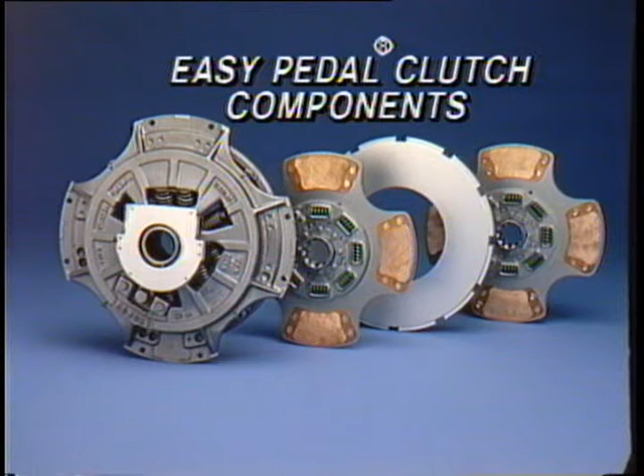Eaton Fuller Easy Pedal angle spring clutches are made up of 4 major components: the cover assembly and 2 driven discs separated by an intermediate plate. These heavy-duty clutches are pull-type, dry disc design.

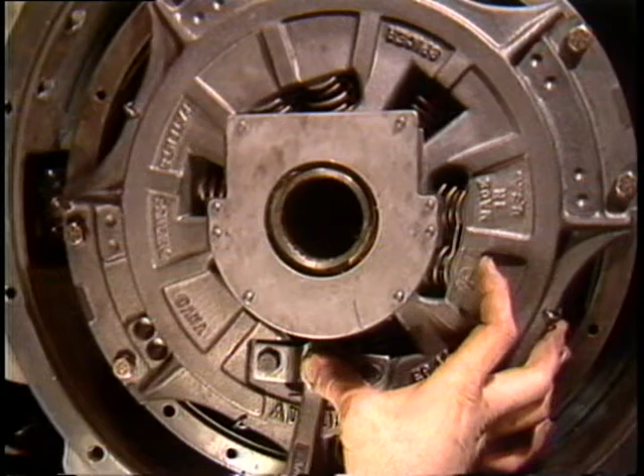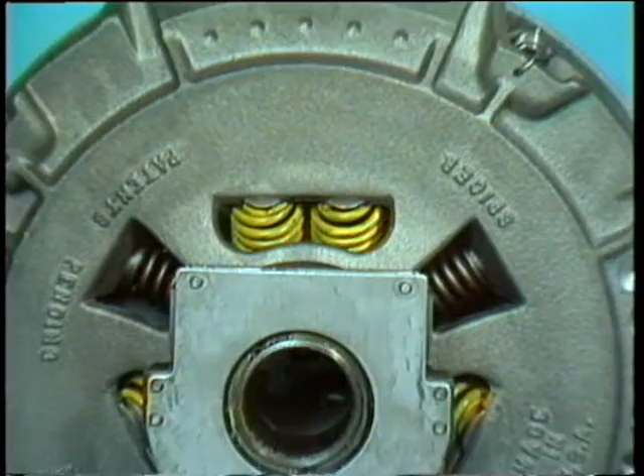In service, mechanical adjustment is required periodically and is facilitated by Fuller's Quick Adjust mechanism. Easy Pedal 2000 models feature the 6-point Quick Adjust mechanism and power thread technology. 3 pairs of angle springs are equally spaced around the clutch cover to reduce the pedal effort required when engaging and disengaging the clutch, ensuring a constant plate load. 3 additional springs are designed to facilitate disengagement and reduce overall pedal effort.

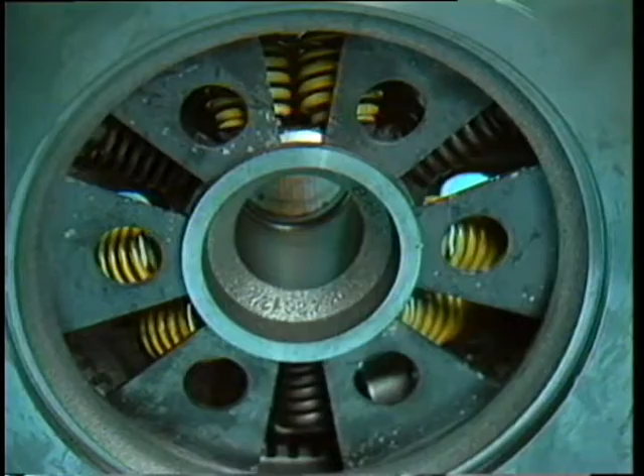In all Eaton Fuller heavy-duty clutches, the springs are isolated from the direct heat of the pressure plate and are angled. Eaton's 15.5-inch clutch has a positive separator pin that improves clutch life and performance by providing cooler operation, smoother engagement, and equal plate separation. The separator pin allows the intermediate plate to move back when the clutch is released, giving a constant gap on both sides of the intermediate plate.

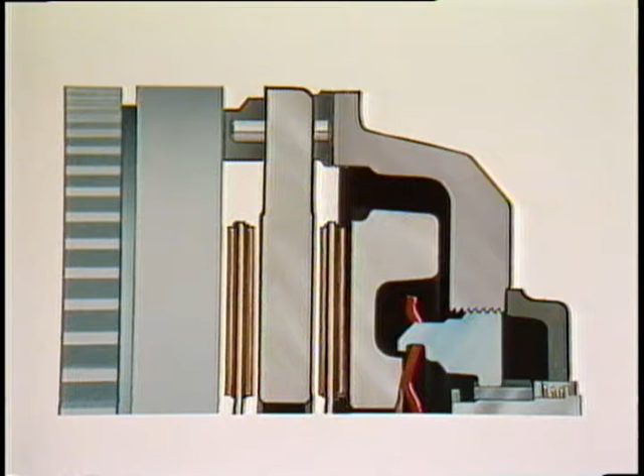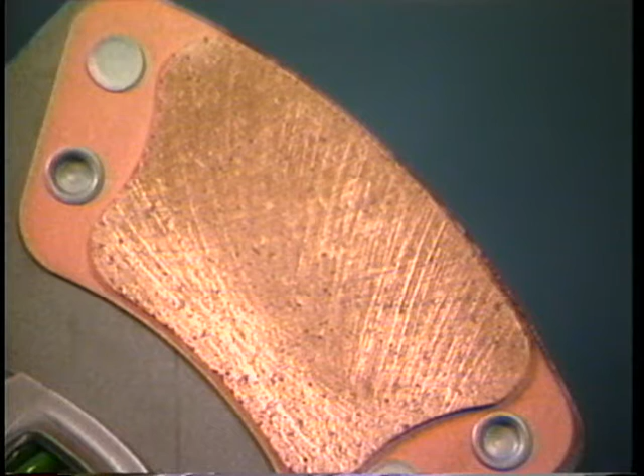Driven discs are available with organic or ceramic facings. Organic facings are for medium-duty highway use, while ceramic facings are for heavy-duty highway or off-highway applications. The life of a clutch is increased by using ceramic-faced driven discs.

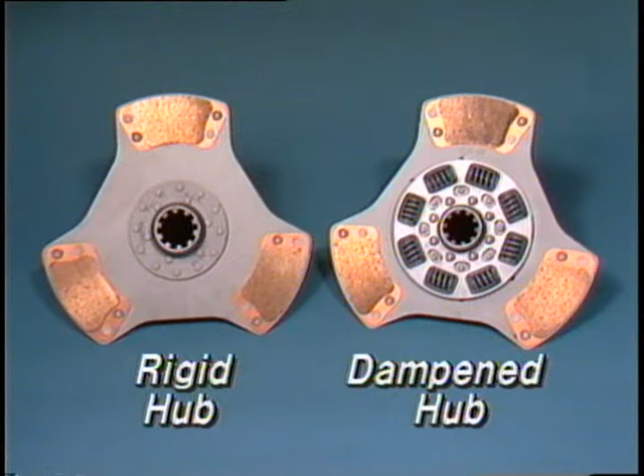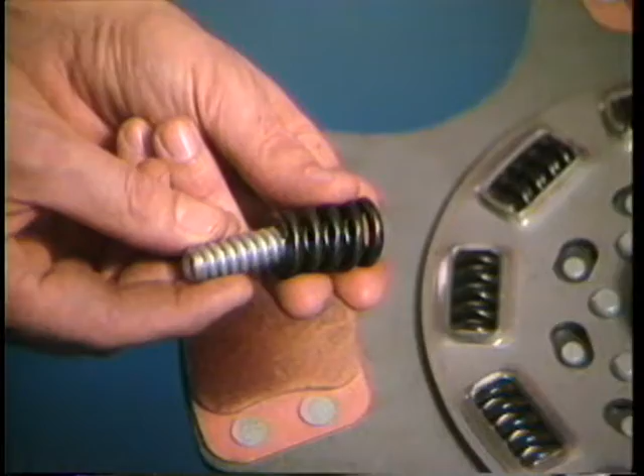Driven discs may be furnished with a rigid or dampened type hub. The dampened type is recommended because of its greater capacity to absorb shock, control torsional vibration in the drivetrain, and reduce spline wear to the transmission input shaft. In extra heavy-duty applications, coaxial springs are used. Coaxial springs are springs within springs which additionally reduce shock and control torsional vibration.

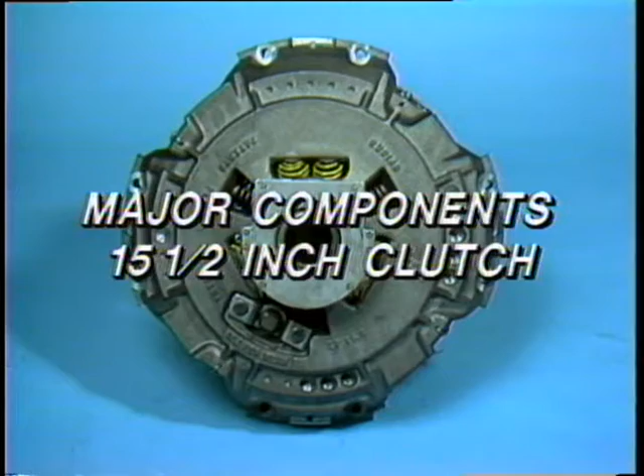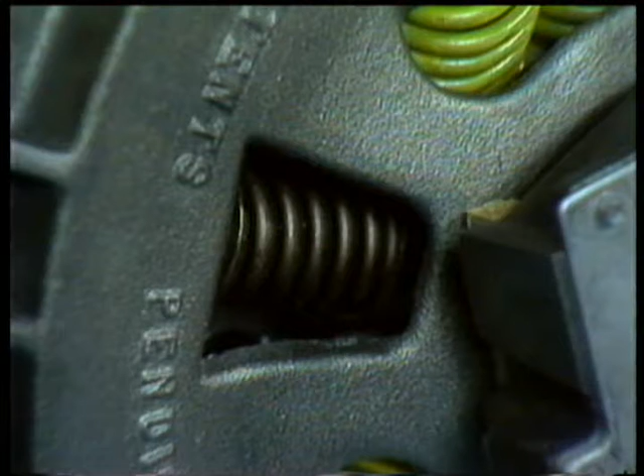Major components of a typical 15.5-inch cover assembly are Fuller's exclusive positive separator, the pressure plate and levers, pressure plate return springs, exclusive internal assist springs, cover, adjusting ring, pressure springs, release bearing, release sleeve, and quick adjust mechanism.

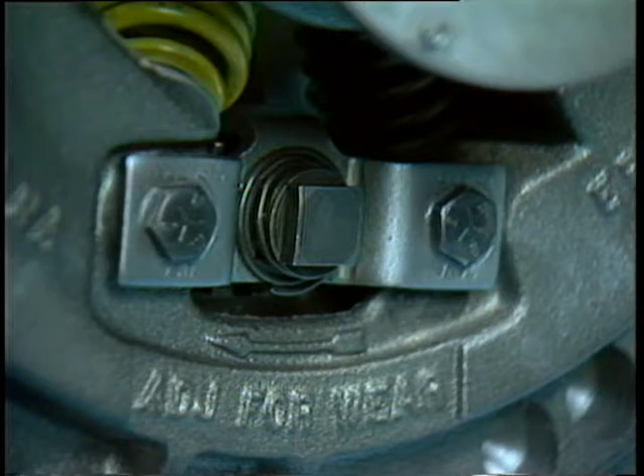14-inch clutches use a different intermediate plate, pressure plate, clutch cover, and driven discs. All other components are the same as in the 15.5-inch clutch.

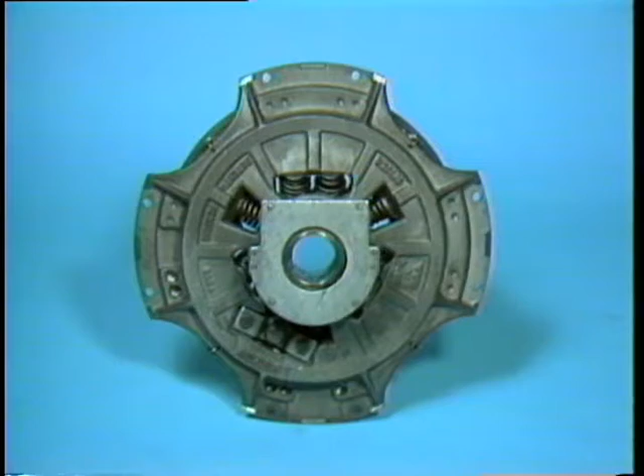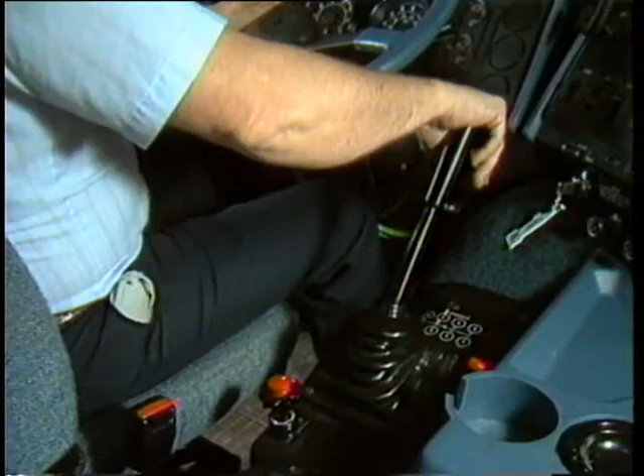On most non-synchronized transmission applications, you will want to install a new clutch brake. Clutch brakes help drivers shift into first or reverse without transmission damaging gear clash. They ensure smooth shifting and are only activated when the driver pushes the clutch pedal to the floor. It should be noted that clutch brakes should never be used for upshifting.

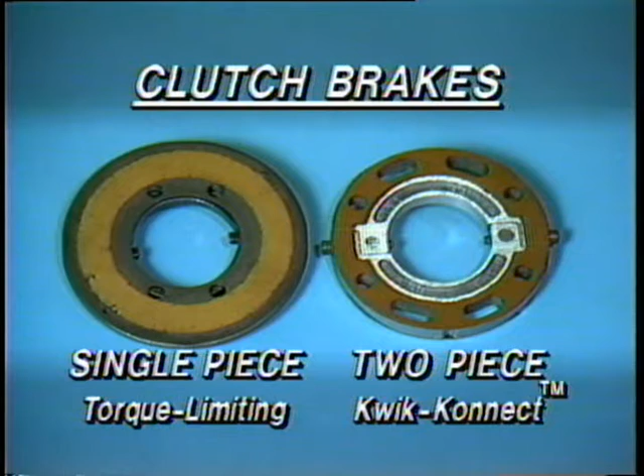Fuller offers 2 types of clutch brakes: the 2-piece Kwik-Konnect model, which can be installed without removing the transmission. Brakes are also available as single-piece torque limiting models. We recommend the torque limiting type because it's designed to slip when heavy loads are reached and therefore extends its service life.

Eaton Fuller clutches should be replaced when adjusting cannot correct for a loss of free pedal or cannot compensate for a slipping clutch.

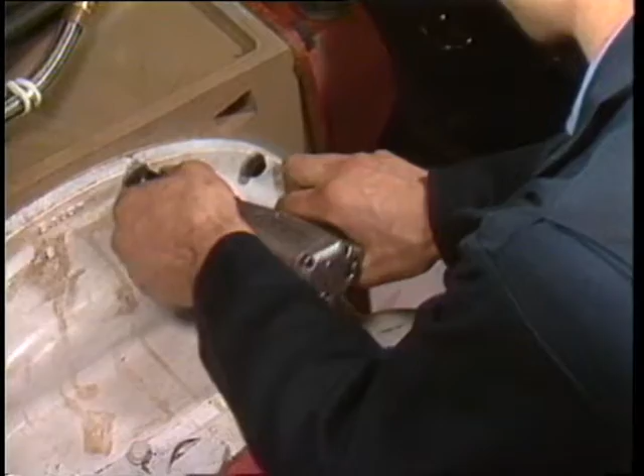If clutch replacement is necessary, the transmission must be removed. When removing the transmission, use a sling or jack to maintain alignment. Don't let the rear of the transmission drop, and don't let the transmission hang unsupported on the spline hubs of the driven discs because it distorts them and could cause poor clutch operation or clutch release problems. Taking these precautions will prevent bending and distortion of the clutch discs and ensure trouble-free performance.

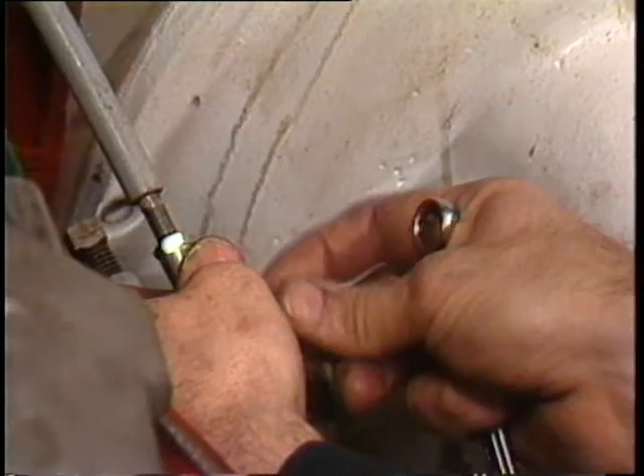Before pulling the transmission free, disconnect the external clutch linkage and turn up the release yoke so it will clear the release bearing when it is removed. Carefully pull the transmission back to remove the spline shaft from the driven discs in the clutch.

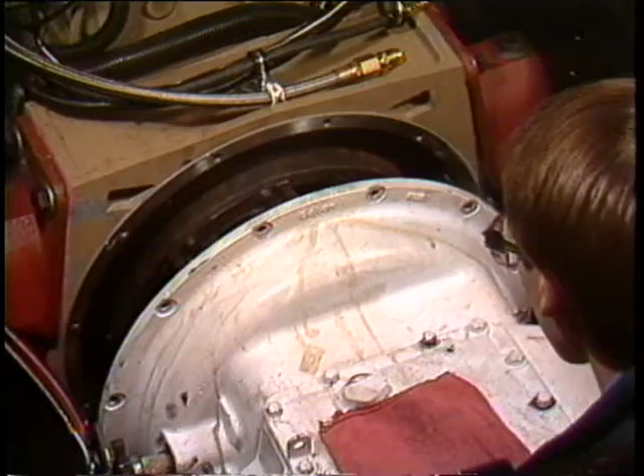Install a spline aligning tool in the release bearing in the driven discs. You can use a transmission input shaft for this purpose. Pull the bearing back using the release tool shown and insert 2 5/8-inch spacers between the flywheel ring and the release bearing housing. The spacers relieve the heavy internal spring load of the clutch cover and allow for reinstallation.

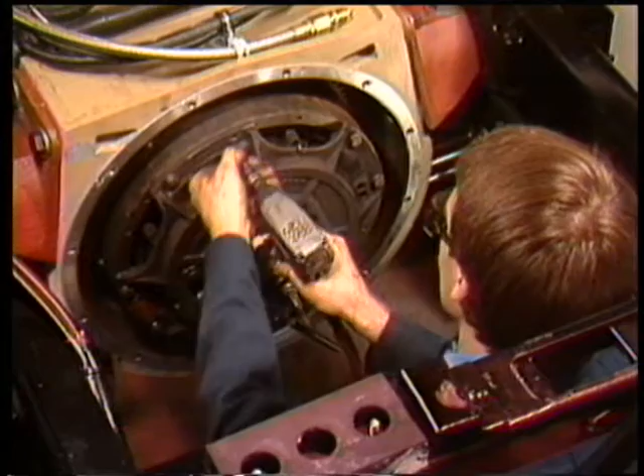Completely remove the top 2 bolts and install 2 guide studs. Take out the remaining mounting bolts and carefully remove the clutch.

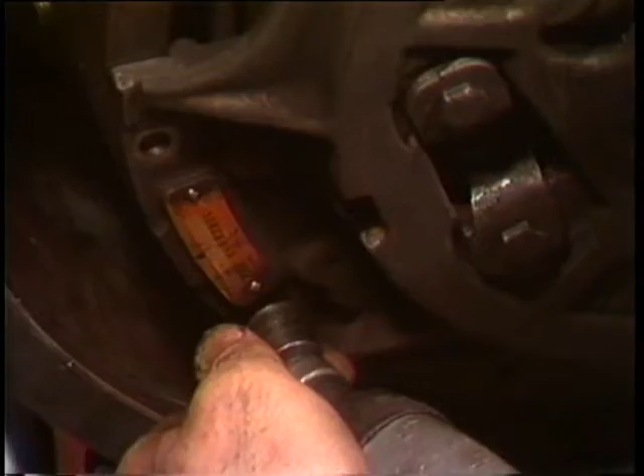You may want to use a hoist to do this because 14-inch clutches weigh approximately 75 pounds and a 15.5-inch clutch installation weighs approximately 150 pounds.

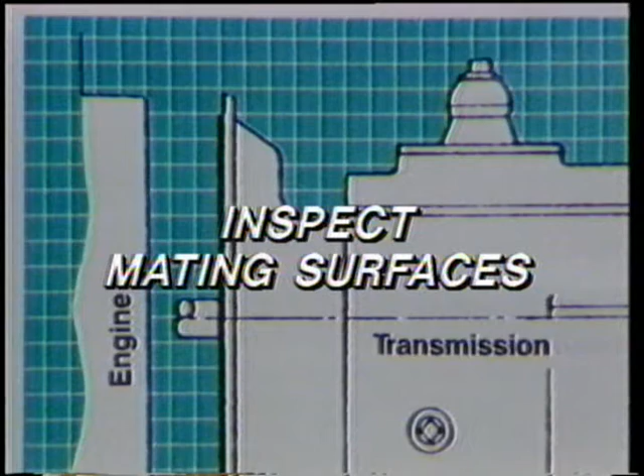Now that the clutch has been removed, the following inspections must be made. Inspect the mating surfaces of the transmission clutch housing and the engine flywheel housing. Any appreciable wear on either housing will cause misalignment. Most wear will be found on the lower half of these surfaces, with the most common wear areas between the 4 and 8 o'clock positions.

Replace the clutch housing if it is worn. Begin by wiping all surfaces before gauging.

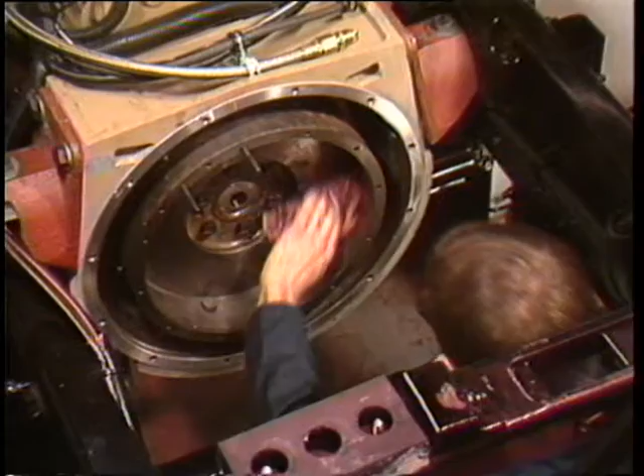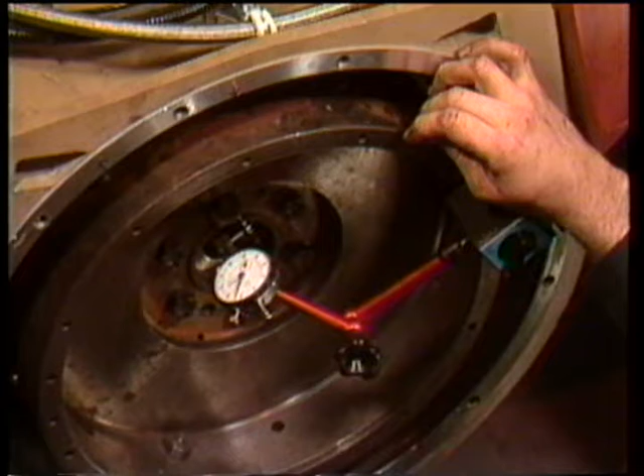Secure the dial indicator to the engine flywheel housing with the gauge finger on the face of the flywheel near the outer edge. Rotate the flywheel or crankshaft. For an easy pedal clutch, the maximum allowable runout is 0.008 of an inch.

Move the gauge finger to contact the pilot bearing bore surface. Again, rotate the flywheel. The maximum total allowable runout is 0.005. If any of these limits are exceeded, the problem must be corrected or misalignment will cause premature wear to the drivetrain components.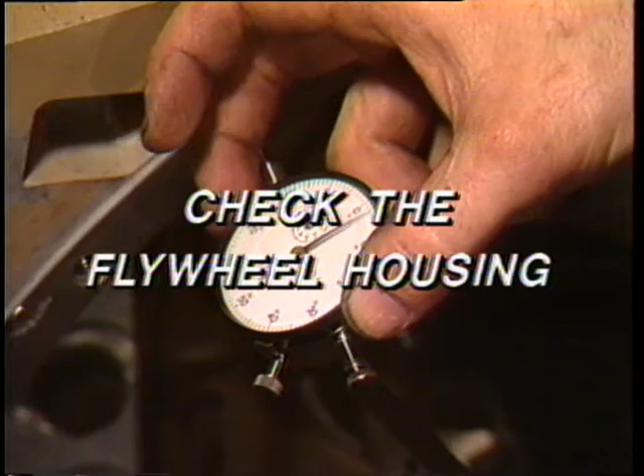Move the gauge finger to contact the face of the engine flywheel housing. Again, rotate the flywheel or crankshaft and then mark high or low points. The total runout should not exceed 0.008. If any of these limits are exceeded, the problem must be corrected or misalignment will cause premature wear to the drivetrain components.

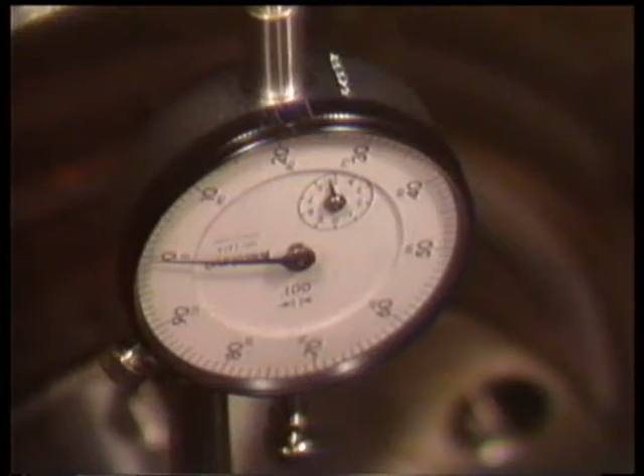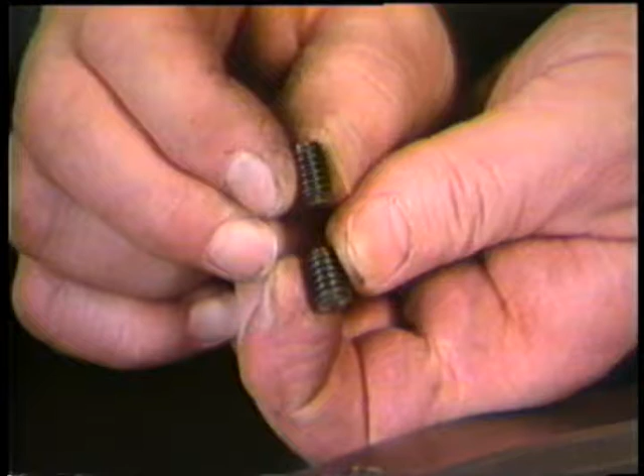Loosen the bolts, remove the flywheel, and set it on a work surface. Remove the 2 set screws from each of the drive pins. Since the drive pins are made of hardened steel and could chip, wear safety glasses when removing old drive pins. Drive out the old drive pins.

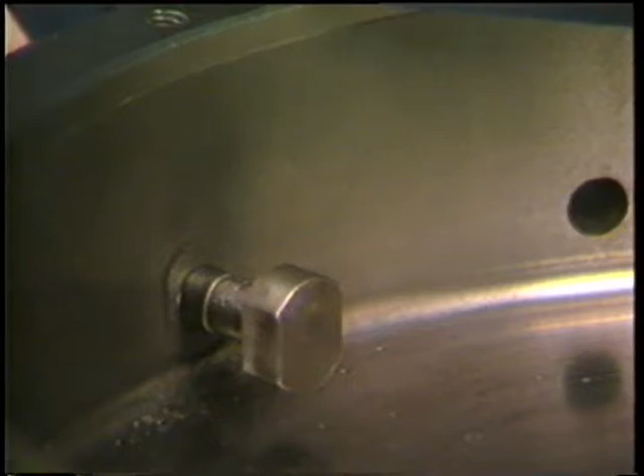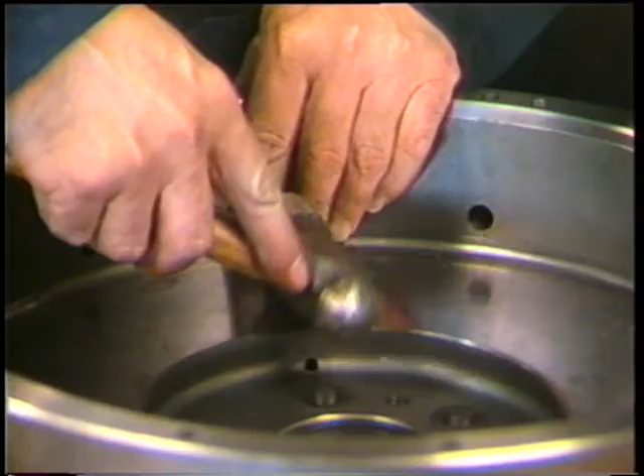Install 6 new drive pins in the previously unused hole in the flywheel. Space them out equally. Make sure that the shanks of the pins are a press fit in the flywheel rim. We recommend using a drive pin alignment tool like the one you see here from the Fuller CSK1 toolkit. Make sure that the heads are square with the friction surface.

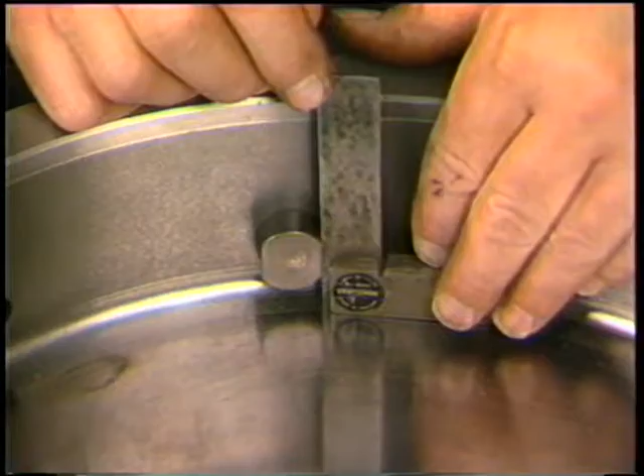Put 2 small spacers on the friction surface of the flywheel and carefully set the intermediate plate over the drive pins. The spacers will prevent getting your fingers pinched by the intermediate plate and give you a finger hold when removing it. Turn the intermediate plate in one direction as far as it will go.

Use a 0.006 feeler gauge and check the clearance between drive pin and the drive slot. Check the same side of each pin. The minimum clearance between the drive pins and the drive slots is 0.006.

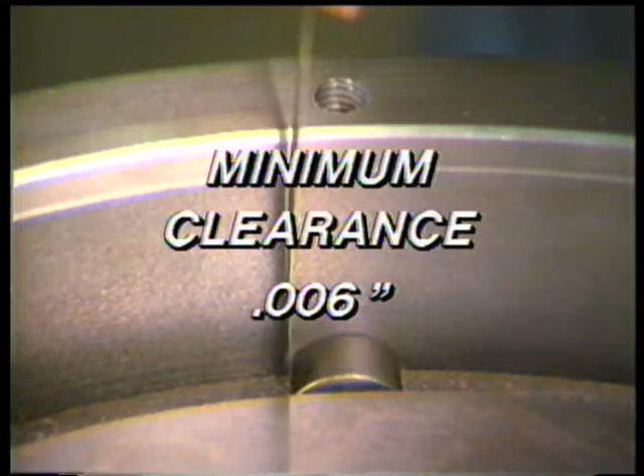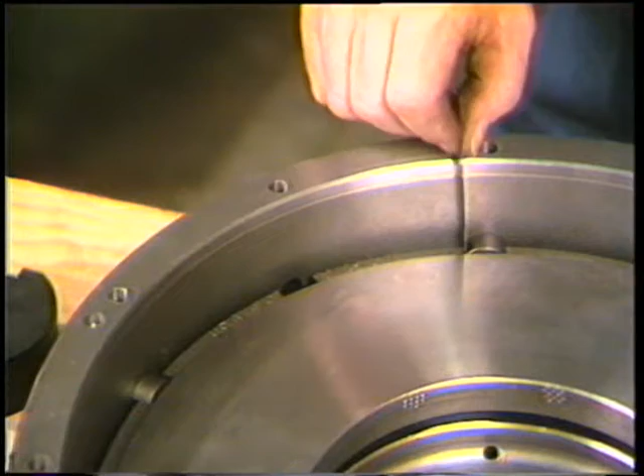If the proper clearance is not obtained, recheck the drive pins for squareness and realign if necessary. Then recheck the clearances. This check is necessary to ensure that the clutch will release properly when installed.

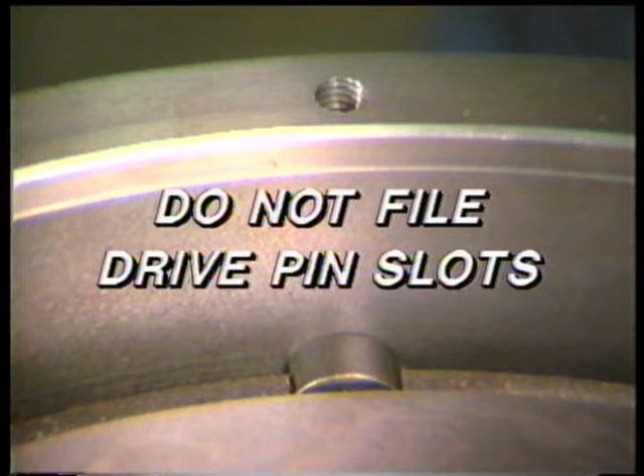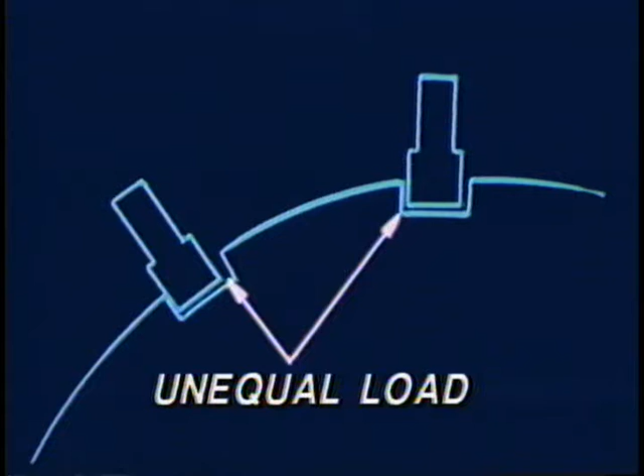Do not file the drive pin slots on the intermediate plate to obtain correct clearances. Doing so will cause an unequal load on the pins. This is a frequent cause of poor release or the clutch not releasing at all. It also can result in broken drive pins.

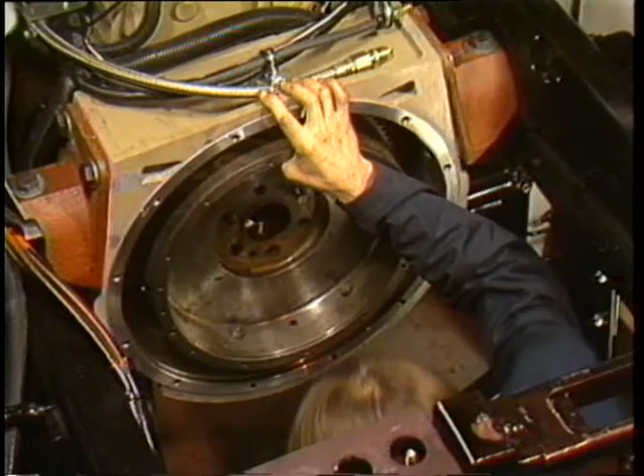If the alignment and clearance are okay, lock the pins in place with 2 new 3/8 inch by 3/8 inch set screws. Reinstall the flywheel to the engine crankshaft, making sure the chalk marks are lined up. Refer to the engine manual for torque specs.

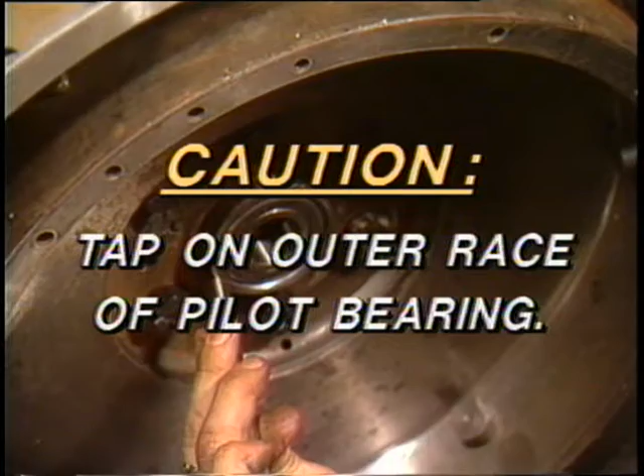Remove the pilot bearing and replace with a new bearing. Caution: tap on the outer race of the pilot bearing only and make sure it is seated properly in the bearing bore. This bearing must have a press fit.

Place the front driven disc against the flywheel with the side stamped flywheel facing the engine.

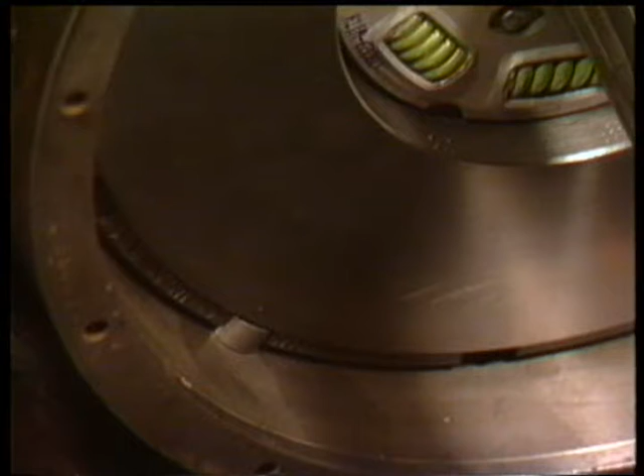Next, install the intermediate plate by positioning the drive slots on the drive pins. Caution again, Super Duty clutches have thicker intermediate plates and thinner super buttons than standard clutches. Do not intermix these components.

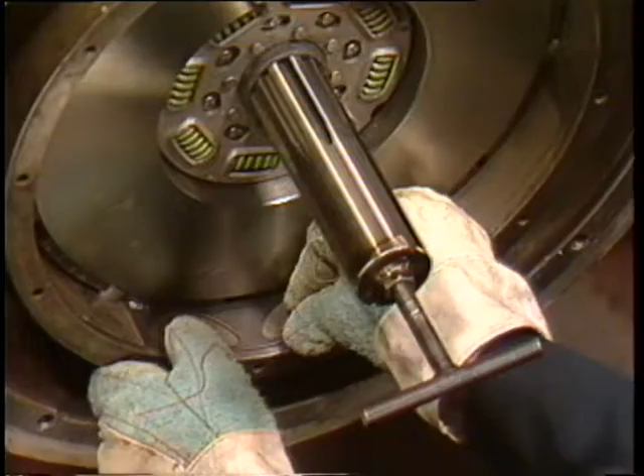If you are installing a Super Duty clutch, be sure to install 3 anti-rattle springs. Space them equally between the drive pins with the rounded sections towards the flywheel face. Because cuts could result from sharp edges, you should wear heavy gloves when installing anti-rattle springs.

Insert the aligning tool through the hub of the rear disc with the side-stamped pressure plate facing the transmission, and install it behind the intermediate plate. Remember, for proper fit, it's imperative that the side-stamped pressure plate faces the transmission.

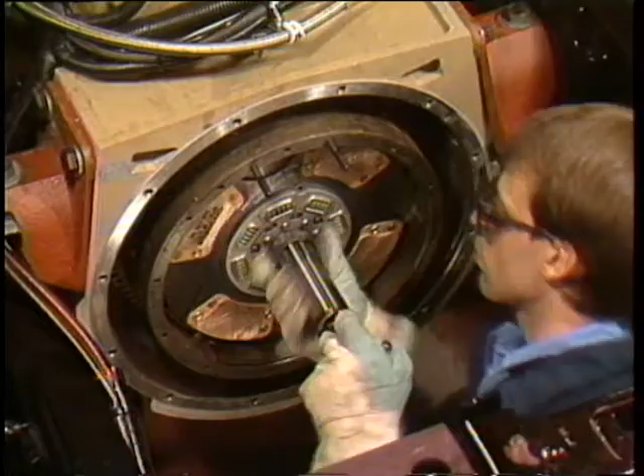Insert the aligning tool through the hub of the front-driven disc and into the pilot bearing. The relative position of the buttons on the front and rear discs is not important.

Position the clutch cover over the guide studs installed at the top of the flywheel. Make sure that the quick adjusting mechanism is aligned with the opening in the bell housing of the transmission.

Start 6 3/8 by 1 1/4 inch grade 5 or better mounting bolts with lock washers and tighten them finger tight.

Remove the guide studs and replace them with bolts and lock washers.

Tighten the bolts in a crisscross sequence to pull the clutch into its proper position in the flywheel pilot. You must start with the lower left-hand bolt. Failure to tighten the bolts in this manner can cause permanent damage to the clutch cover or create an out-of-balance condition.

As the bolts are tightened, the wooden spacers should fall out. If they do not fall free, be sure to remove them.

To achieve the final torque, progressively tighten all bolts to 35 to 40 foot-pounds. You may have to lightly tap the aligning tool with a mallet to remove it.

Installation of the 14-inch clutch is now complete. Reinstallation of the transmission and the adjustment procedure will follow the section on installing 15.5-inch clutches.

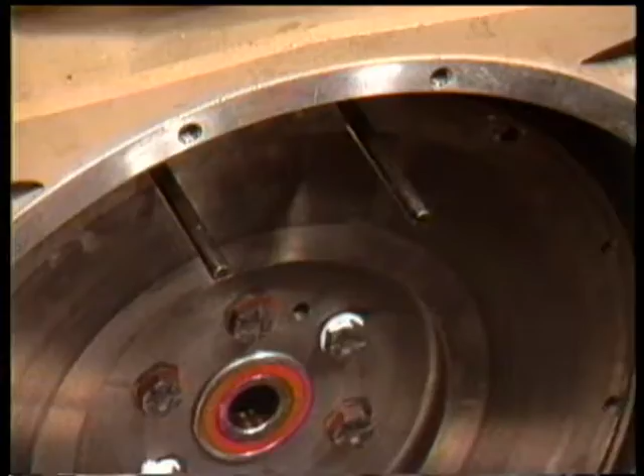When installing a 15.5-inch clutch, rotate the flywheel to level the 2 guide studs. Insert the aligning tool through the release bearing sleeve in the new clutch.

Put the rear driven disc on the tool with the side-stamped pressure plate facing the pressure plate.

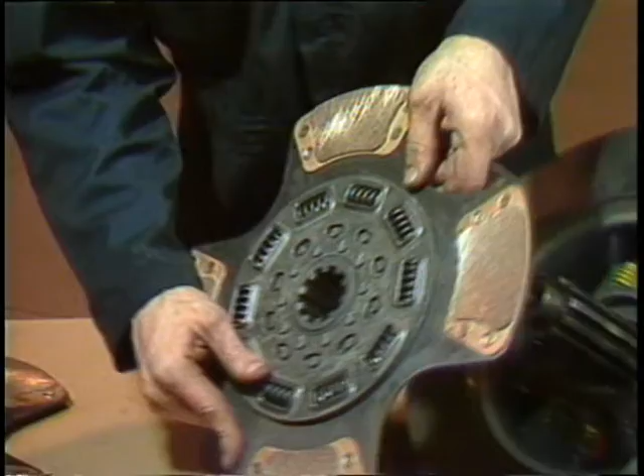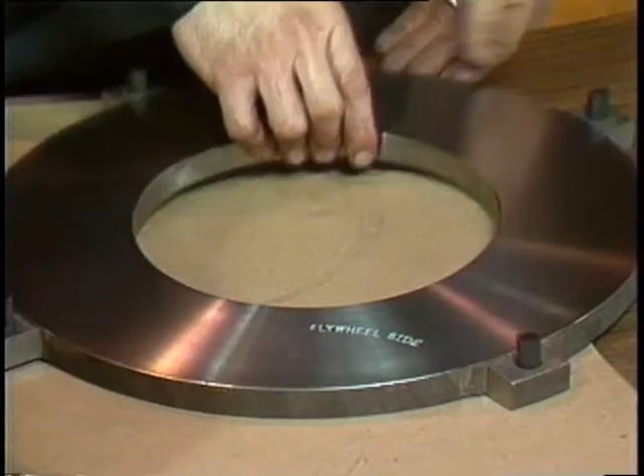Place the intermediate plate in the clutch cover and align the driving lugs of the plate with the slots provided. The positive separator pins must be flush on the pressure plate side.

Install the front disc on the aligning tool with the side-stamped flywheel facing the engine. Remember, it's imperative that the side-stamped flywheel faces the engine. The relative position of the buttons on the front and rear-driven discs is not important.

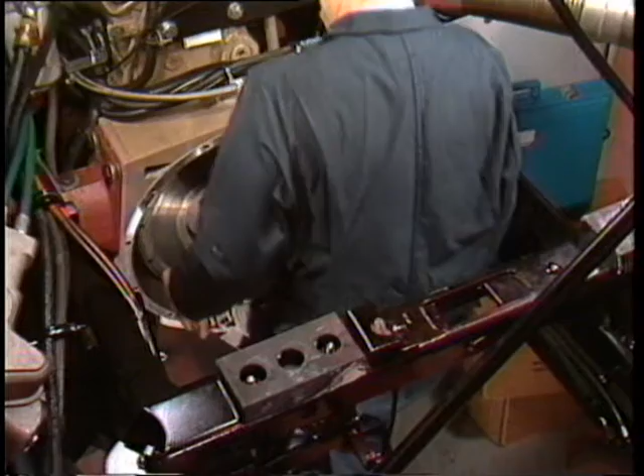Make sure that the quick adjusting mechanism is aligned with the opening in the bell housing of the transmission. Position the clutch over the guide studs and slide it forward.

A 15.5-inch clutch weighs about 150 pounds, and a hoist may be required to lift it into place.

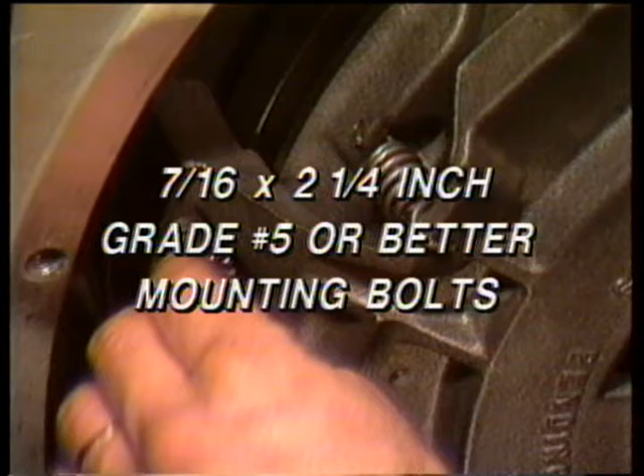Start 6 7/16 by 2 1/4 inch grade 5 or better mounting bolts with lock washers and tighten them finger tight.

Tap the aligning tool to make sure it is centered and seated in the pilot bearing. Remove the guide studs and replace them with bolts and lock washers.

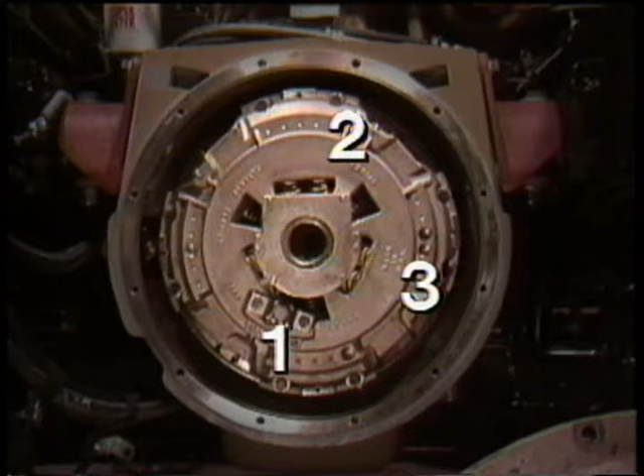Tighten the bolts in a crisscross sequence to pull the clutch into its proper position in the flywheel pilot. You must start with the lower left-hand bolt. Failure to tighten bolts in this manner can cause permanent damage to the clutch cover or create an out-of-balance condition.

To achieve the final torque, progressively tighten all bolts to 45 to 50 pound-feet. You may have to lightly tap on the aligning tool with a mallet to remove it.

Using a flat end 1/4 inch diameter punch, lightly tap each of the 4 positive pin separators toward the flywheel. After tapping, the pins should be flush against the flywheel. Installation of the 15.5 inch clutch is now complete, and you're ready to reinstall the transmission to the engine.

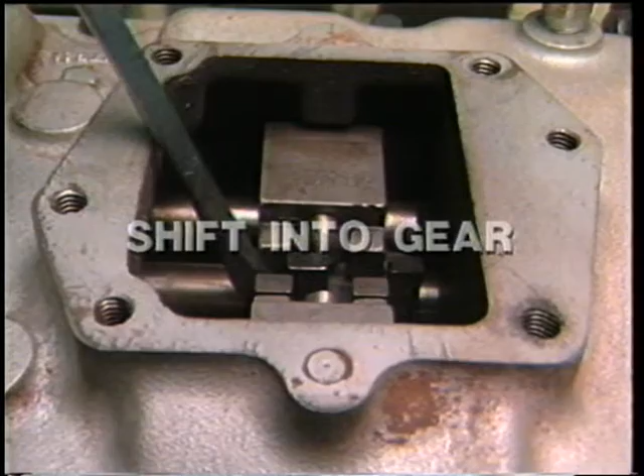To reinstall the transmission, shift it into gear. When installing the clutch brake, be sure to install it on the input shaft against the face of the transmission after checking for excessive bearing cap wear.

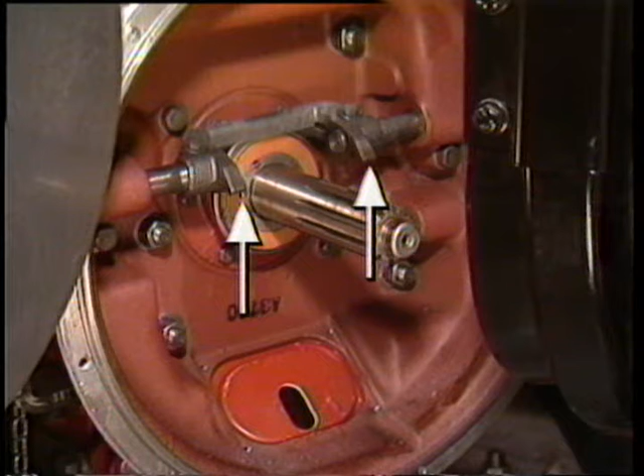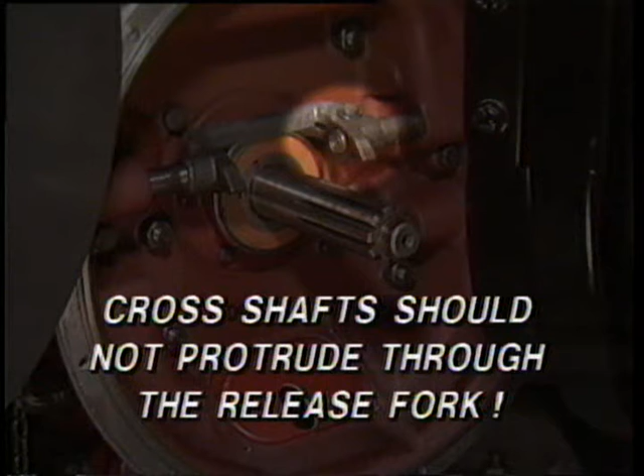Check for wear on the fingers of the clutch release yoke. Also check the cross shaft and cross shaft bushings. Replace them if necessary. Check to be sure that neither cross shaft protrudes through the release fork, since this could cause side loading of the release bearing.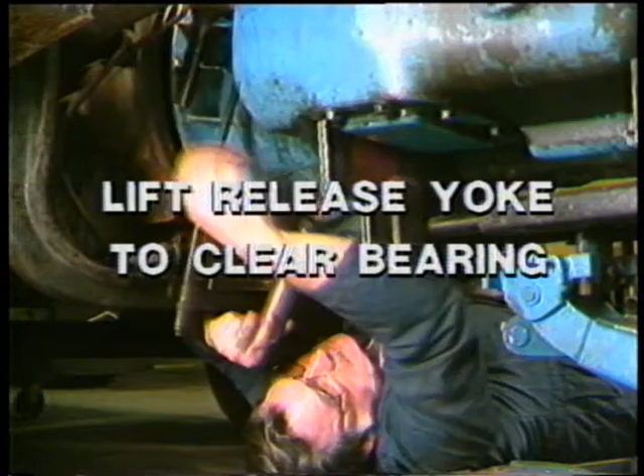Make sure that the transmission is square to and aligned with the engine when it is raised into position. Lift the release yoke so that it clears and is rotated over the wear pads of the release bearing as the transmission is moved forward.

Be careful. The release yoke fingers must not be elevated to the straight out position, as they would damage the clutch cover when moving the transmission forward. Move the transmission forward, but never, and we repeat, never, force the transmission into the clutch or flywheel housing. If it doesn't enter freely, investigate the cause and make adjustments until it does.

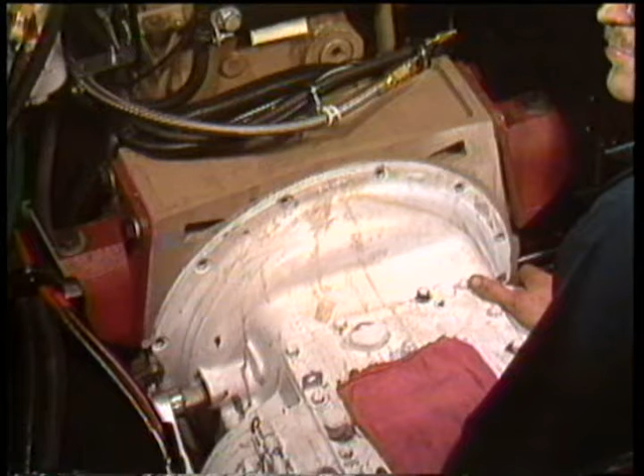Don't let the rear of the transmission drop, and don't let the transmission hang unsupported on the spline hubs of the driven discs, because it distorts them and could cause poor clutch operation or clutch release problems. Taking these precautions will prevent bending and distortion of the clutch discs and ensure trouble-free performance.

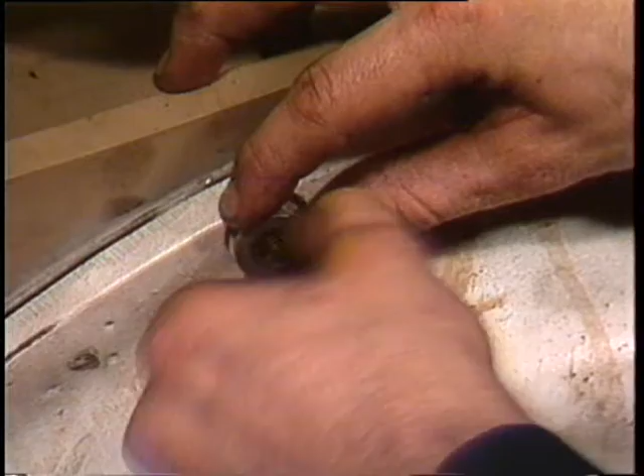Mate the transmission with the engine housing and install the housing bolts. Torque the bolts to the proper manufacturer specifications. Attach the clutch release linkage. Installation of the transmission is now complete, and adjustments can be made to the clutch.

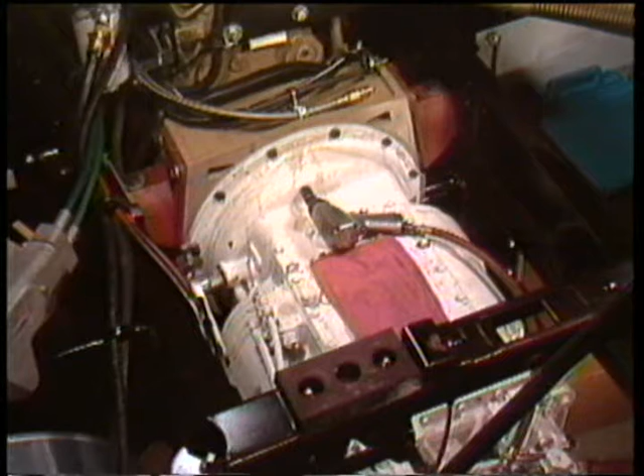To help you better understand the clutch adjustment procedure, the following terminology should be understood. Release travel: proper release travel assures that the release bearing is capable of releasing far enough, allowing the two driven discs to spin freely, avoiding clutch drag.

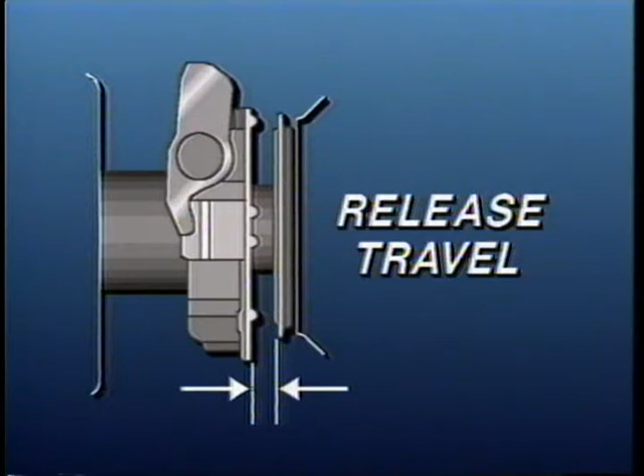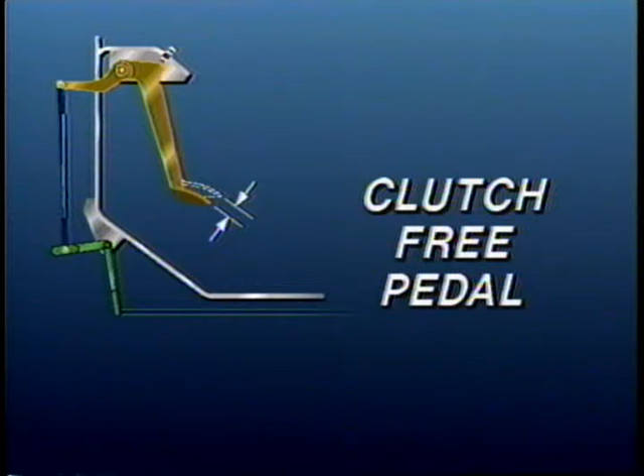Clutch free pedal: pedal free play is an indication of clutch adjustment interval. When free pedal is no longer present, adjustment is required. Clutch free travel: free travel is the clearance between the release yoke and clutch release bearing wear pads. This dimension regulates how much free pedal is obtained in the cab.

Clutch brake squeeze: proper clutch brake squeeze assures that the input shaft will stop rotating when the vehicle is stationary. A clutch brake is only used when shifting into first or reverse gear. Keeping clutch brake squeeze close to the end of the pedal stroke helps to assure that it will not be used as an upshifting brake, causing brake life reduction.

The following is a brief explanation of adjustments. Normal service internal clutch adjustment: clutch component wear is adjusted internally in the clutch through clockwise rotation of the adjusting ring. This adjustment moves the release bearing toward the engine and reestablishes the 1/2 inch release travel and 1/8 inch free travel.

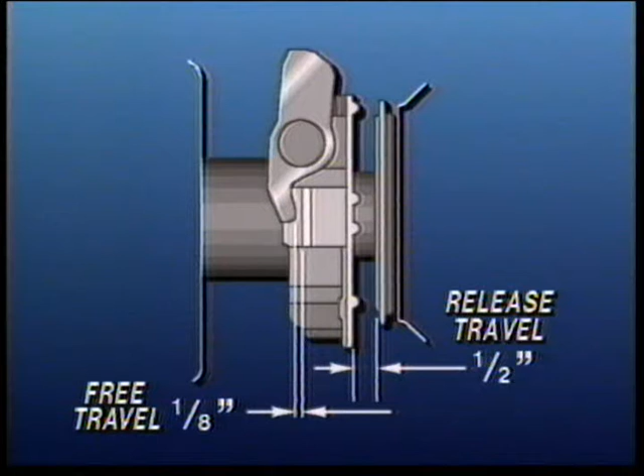Linkage adjustment should only be performed in the following two cases. First, during initial dealer preparation to set total pedal stroke and yoke throw. And second, to compensate for linkage wear, clutch brake wear, transmission bearing cap wear, or replacement of relative clutch or linkage components.

Now we are ready to begin the adjustment procedures. With the pedal in the up position, measure the distance between the back of the release bearing and the clutch brake. The release travel distance should be 1/2 to 9/16 of an inch. If not, adjust the clutch internally to obtain this dimension.

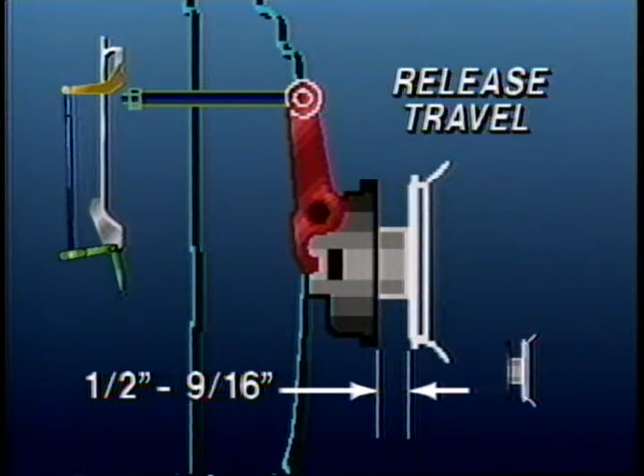In order to turn the adjusting ring, fully depress the clutch pedal. For easy pedal quick adjust, insert a 3/4 inch 12-point socket or 3/4 inch boxed-in wrench and depress the square-headed bolt to adjust the clutch.

Rotating the adjusting ring clockwise will decrease the release travel dimension, and rotating the adjusting ring counterclockwise will increase the release travel dimension.

When the 1/2 to 9/16 inch dimension has been achieved, assure the quick adjust is in its locked position. The flat on the bolt head will align with the flat on the bracket. Verify the 1/2 to 9/16 inch dimension when the pedal is in the up position.

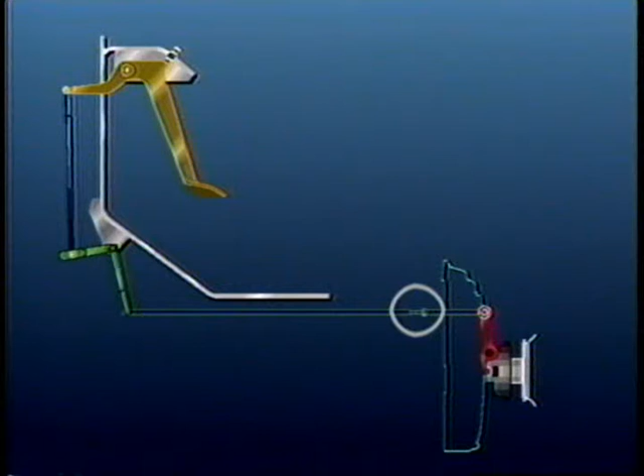Now adjust the external linkage to obtain the 1/8 inch free travel dimension. This is the distance between the release yoke and the release bearing wear pads. Proper adjustment of the free travel should correlate to a free pedal in the cab of 1.5 to 2 inches at the top of the stroke. Consult the OE manufacturer's service manual for exact free pedal dimension.

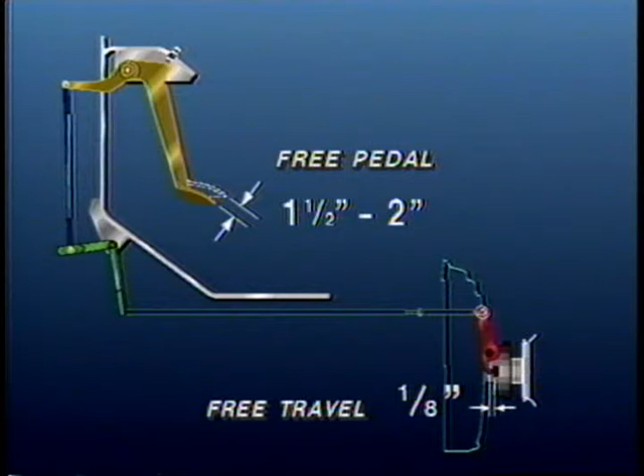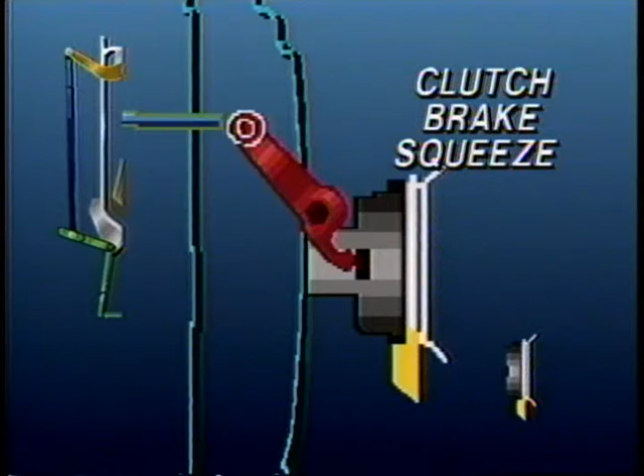Check that the clutch brake squeeze begins when the clutch pedal is 1/2 to 1 inch before the end of its stroke. To check this, insert a business card or similar 10/1000 feeler gauge between the release bearing and the clutch brake. Depress the clutch pedal to the end of the stroke and squeeze the card. Let the pedal up slowly and stop when the card can be pulled out. The pedal position should be 1/2 to 1 inch from the end of the pedal stroke.

If these dimensions cannot be obtained, review your OE manufacturer's service manual or contact your field representative: 1/2 to 9/16 inch release travel, 1/8 inch free travel at the yoke, and 1/2 to 1 inch clutch brake squeeze from the end of the pedal stroke.

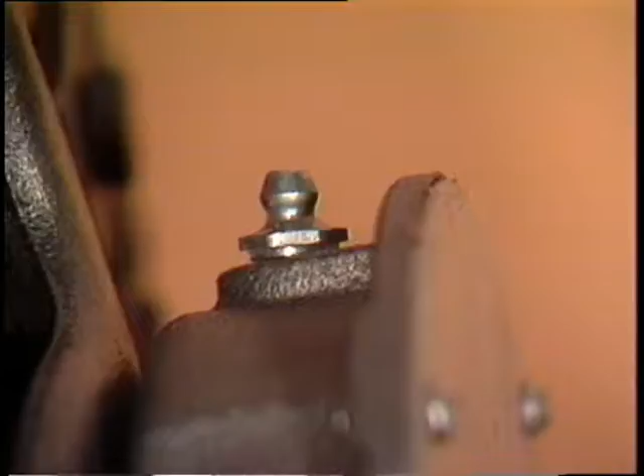After completing the clutch and linkage adjustments, lubricate greasable release bearings with a recommended high temperature lubricant. Sealed bearings do not require additional lubrication. See your Fuller service manual for recommended lubricant types and manufacturers.